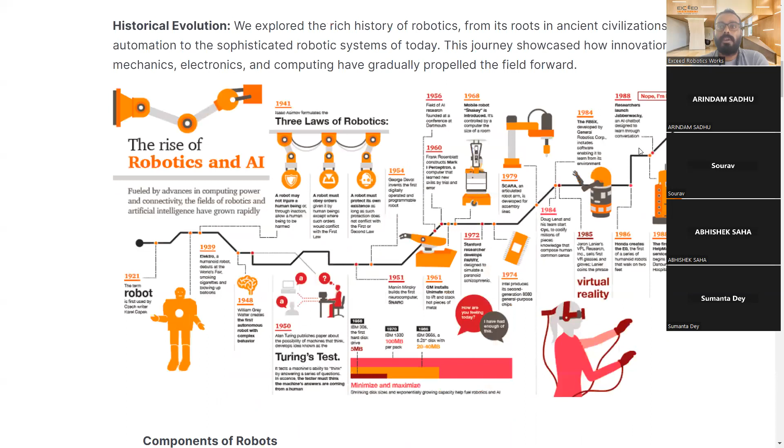If we see the historical evolution, how it came into existence and where it is currently being used, there's a funny story with the evolution of robotics, because a Czech writer, Karel Capek, introduced robotics in his play. He performed a play, and you can search through Google as well, you will find plenty of videos of that play on the internet.

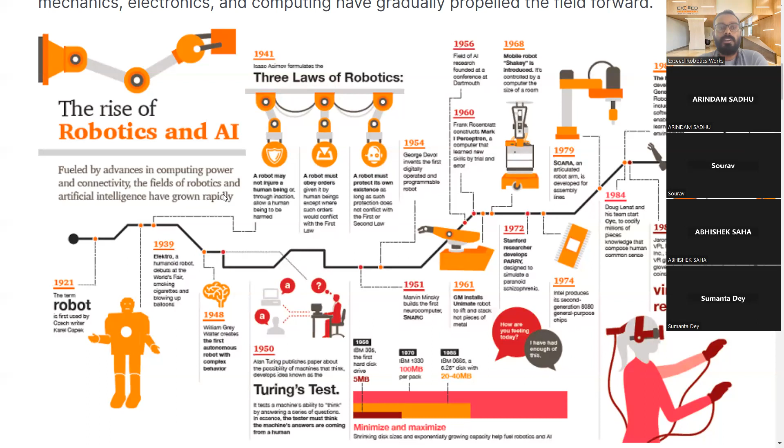He performed a play to explain to the world that we will require some devices, or in future we will have some humanoid kind of structure in place of human beings to help us carry out day-to-day tasks, or help in industry, in the automation sector, as well as everywhere around the world. It started in the year 1921.

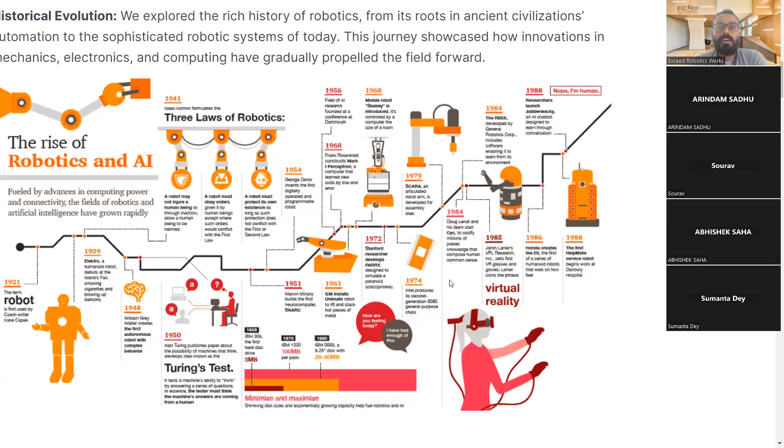Further, we have the current scenario where we are utilizing robotics in each and every sector, in assembly facilities, production facilities, as well as manufacturing sectors. So if we look closely at how a robot works, what are the different components of a robot, you can see there are plenty of things which we can correlate with our natural bodies.

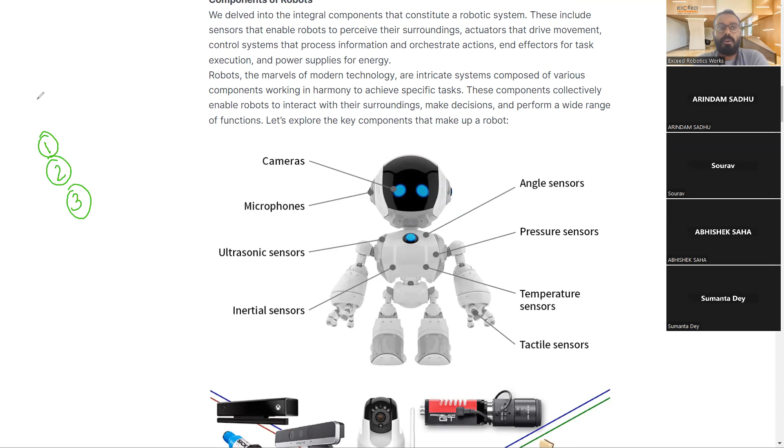According to the human body, we have three sets of things in common. In a computer also, we have these three sets of things. First is the input devices in the computer, second is the processing unit, and third is the output device.

Basically, input devices in a computer gather information from the physical environment, and the processing unit decides what to do based on the input coming from the environment, and what not to do. As human beings, we were also taught in this regard by our parents, loved ones, and many people guided us throughout the journey.

Even right now, in engineering college, teachers and faculty members were guiding you to do certain tasks in a proper way, and not to do some tasks without support from others. That is much more important.

That is what we call the programming feature in robotics. We are programmed like our parents guided us to do certain things and not to do certain things. Similarly, we feed programs to the robotic structure to perform certain tasks in the environment.

We have eyes in our body to give us visual perception, but in a robotic structure, we have cameras and various kinds of sensors to provide input to the robot's brain. The processing unit is nothing but the brain of the robotic system or any industrial automation system, through which it decides what to do and what not to do.

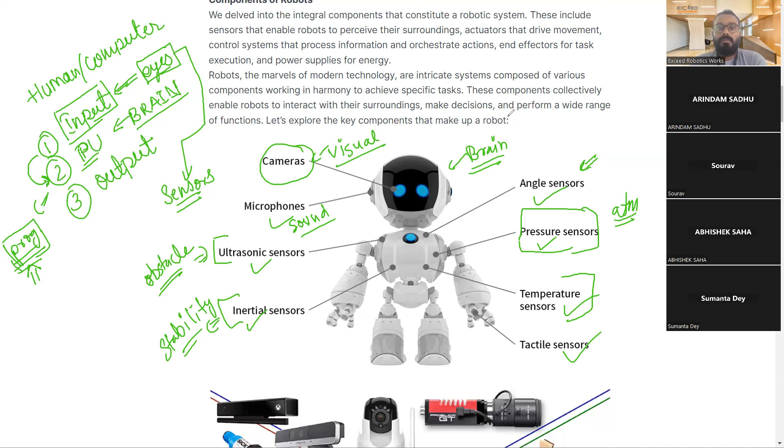So if we move further, we can see one more example to clear our doubt. We have different categories of sensors in the robotic body, whether we are building a simple robot for day-to-day tasks, or building some industrial automation - these kinds of things are required.

We have various kinds of distance sensors. The audition sensor provides audio ability, learning audio from devices. The touch sensor provides the feedback of sensation of touch, like a robot can feel something is in its hand. And vision is all about camera modules, which can identify certain things.

Have you seen any implementation of these devices in your day-to-day life? Do you have any idea how these devices are being employed around you? Anyone have an idea where you've seen these sensors used to help carry out certain tasks or regular activities?

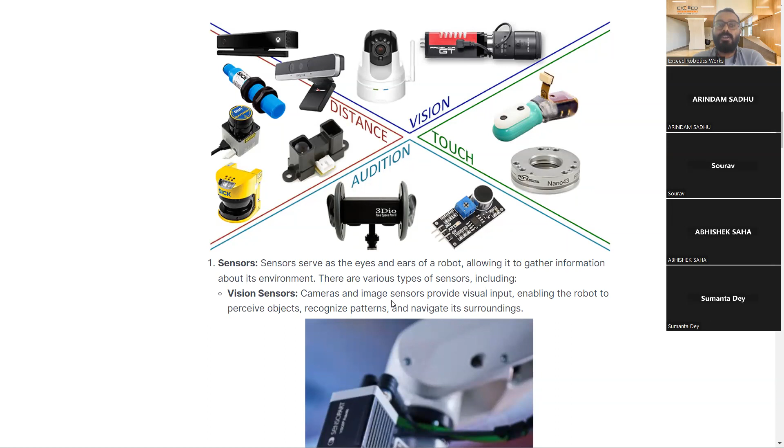No? For vision, just like CCTV camera is used. Yeah, that's great. So apart from the CCTV camera, we can see one implementation of camera technology in traffic light signals, right?

The camera can detect and take video from the environment, and further programming can detect the presence of a person wearing a seat belt or not, or a person wearing a helmet while riding a bike or not. These systems are already implemented, and that particular system is known as ITMS.

We are talking about the ITMS project - Intelligent Traffic Management System. This kind of system is also part of automation, utilizing several programs and combinations of these things to help carry out the task, so authorities can detect whether violators are there or not.

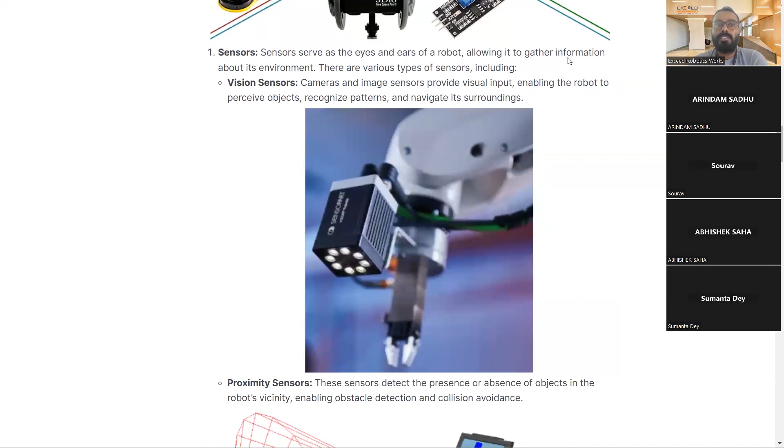So you can see plenty of vision sensors being employed in different robotics. If you go through Google search, you'll find plenty of cameras and image sensor modules provided, and in a later slide we will discuss their implementation.

From the robotics point of view, many boxes have color codes in them. In separation industries where the process requires identifying each object, and we have to separate those objects accordingly into racks or other places, we can utilize the image sensor to understand what is in front of the robotic structure.

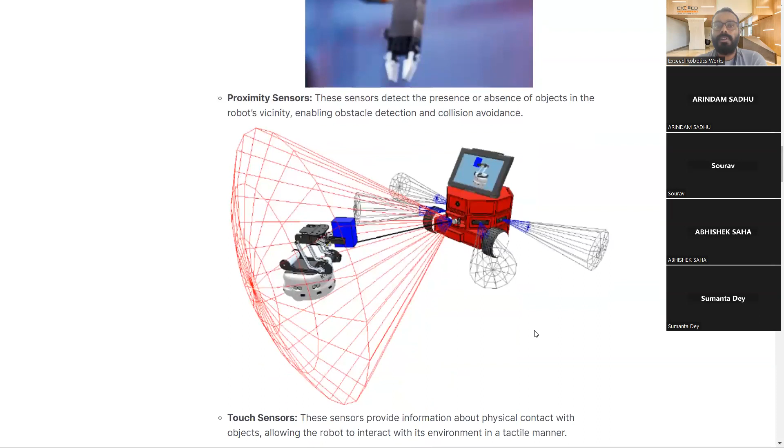So proximity gives the alert system, providing the alert feature to the robotic structure. It helps the robotic structure identify the robotics environment. Proximity sensor can detect obstacles in front of the robotic system, and we utilize the proximity sensor to build a 3D map around the robot.

We build a 3D map around the robot so it can understand what is on the right hand side, what is on the left hand side, in front as well as in back. Whenever an obstacle comes in front of the device, the sensor will inform the brain to stop producing motion in that direction, so the robotic structure will stop its command and follow another direction from the brain command.

So we are utilizing these kinds of sensors in our robotics structure to help robots understand more about their environment, as well as perform their work without any further problem. One more example is the touch sensor, and you all know the importance of touch sensor in our life, right? Do you know where touch sensors are currently being used?

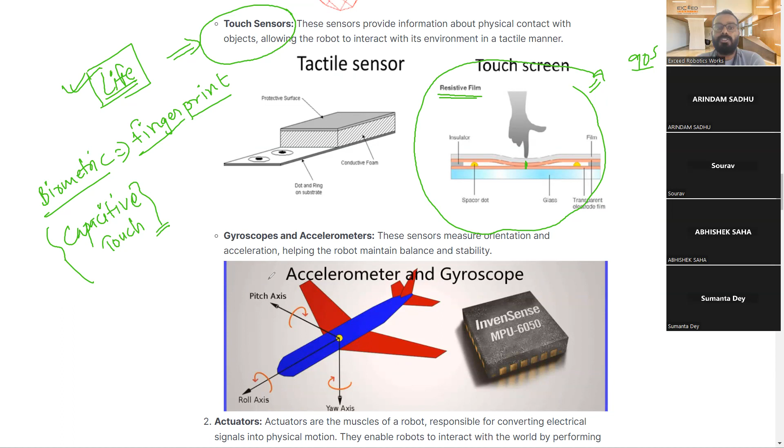Right now we have another technology in our hand, what we call capacitive touch. Capacitive touch takes the capacitance from your body and informs the mobile to do certain tasks. It won't work if you use plastic or any other material compared to the normal skin of our body. This is how the capacitive touch screen works in our mobile phone.

Further, we have gyroscope and accelerometer. You will know where gyroscope and accelerometer are used nowadays. One major example is in planes and different rocketry systems. Have you ever heard about SpaceX or Tesla, and the founder of both, Elon Musk?

Have you ever heard this name? Correct. And why is SpaceX so popular? Do you have any idea? Anyone have any idea why SpaceX is popular in the rocketry business? Anything that's in your mind, just speak it out. I'd like to see your knowledge base so I can deliver the content accordingly, that's very important for me to estimate everything.

They make reusable rockets, that's a great answer. Reusable rocketry system means once you launch your rocket from the ground to outer space, it will come back to the ground and land itself. There's no involvement of human interaction in this process, because it utilizes these particular sensors to identify the location of the rocketry system, so it can sense which direction and what orientation the incoming rocket has, and then it shoots out the propellers.

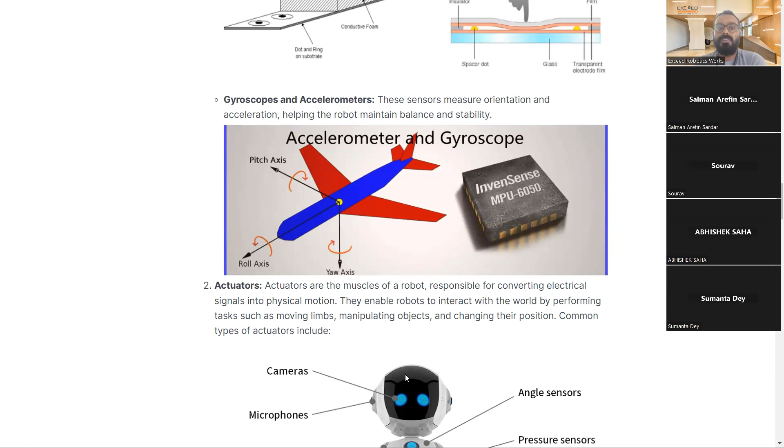So after that, what we do have is the actuation system. Remember, I mentioned one of the important terms, like why the robotics structure does have actuators, right? And what actually is the actuator in a robotic system? Actuator is nothing but relates to the three basic components to build any robotic system.

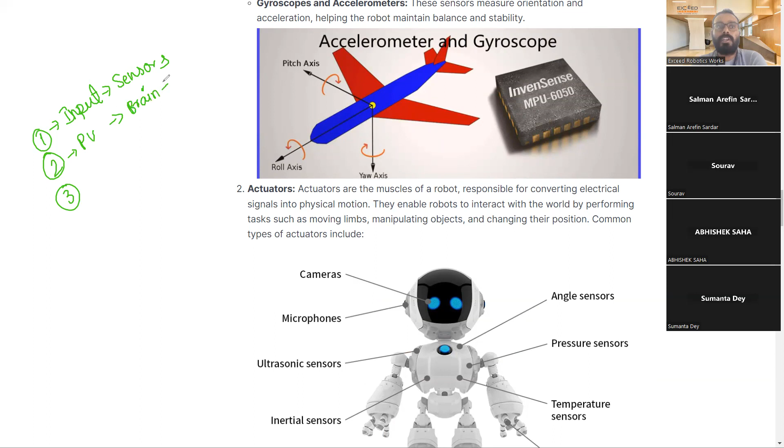First one is the input device, and in robotics we call it the sensors. Second one is the processing unit, which we call the brain of the robotic system, or the technical term for this particular brain is microcontroller. We are going to utilize some microcontrollers for this application. And further, what we do have is the output device, which is responsible to provide the actuation and locomotion.

Actuation and locomotion. And why I mentioned actuation and locomotion, because it is all about producing some kind of motion in the body itself. So actuation and locomotion system is responsible to produce motion in the body. The word actuator came from the word actuation. Actuators are able to provide the functionality of motion in the robotic body.

So actuators are the muscles of a robot, responsible for converting electric signal into physical motion. They enable robots to interact with the world by performing tasks such as moving limbs, manipulating objects, and changing their position. And the common type of actuators are... I guess one mistake happened there.

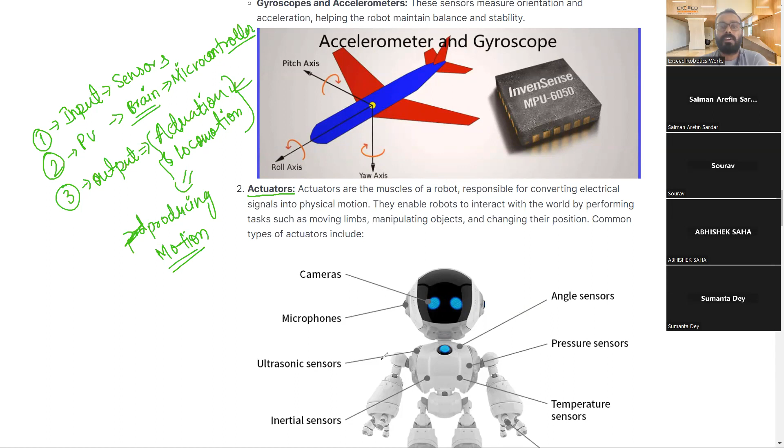This image is mentioned here, but this one is not the right image. I will share you different images of these actuators in the group.

So after the actuator, what we do have is different kinds of motors. Actuators are something different compared to motors, right? You already learned the concept of motors in your earlier classroom program in class 10, 11, 12.

And further in engineering, you heard this particular term like actuation. So a motor is a device which can provide actuation in a robotic body, but is not actually the actuator, because it always produces motion in a circular direction, whether it is clockwise direction or anti-clockwise direction. So, clockwise direction and CCW.

Remember, during the workshop I explained, if by any chance you attended the last workshop in GKCM, you have understood the concept of servo and why we are utilizing servos in place of motors in our robotic system. Do you have any idea what servos are and why we are going to use servos in our robotics applications?

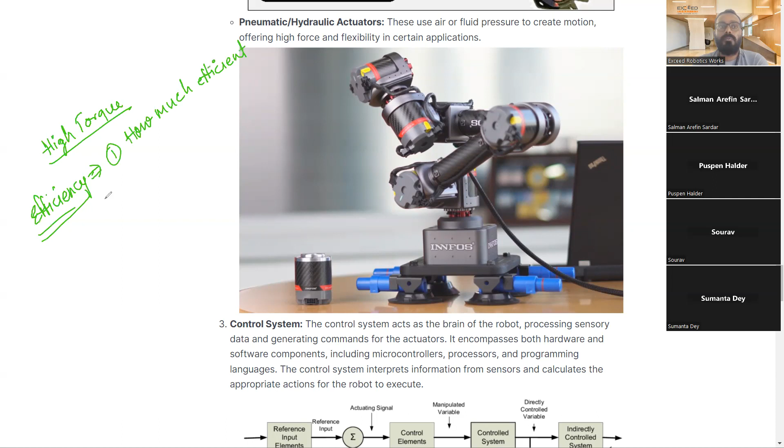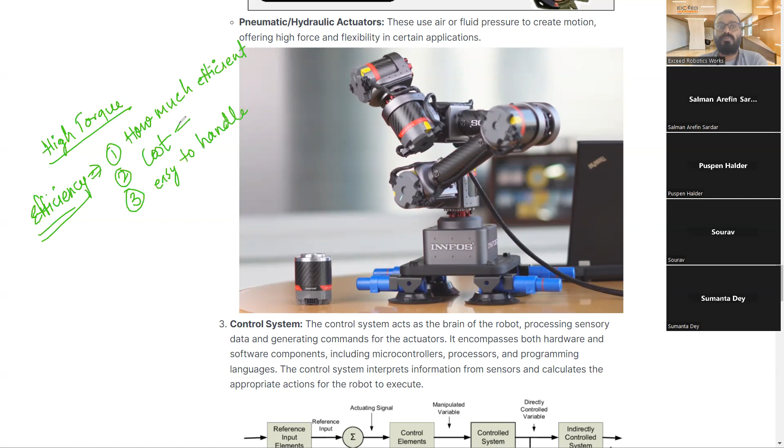And whenever we talk about the usability of high torque in industrial automation, it means we sometimes think about the term of efficiency. And whenever we design something, even if you're going to build some project, we think of a few considerations. First one is how efficient the system is, and the cost involved in building that particular project. The third one will be how easy it is to handle. So whenever cost comes into play, and we talk about the electrical energy to drive the engines or drive things like the robotics system itself, it requires more electric power compared to conventional things.

So using these fluids, meaning air and liquid...

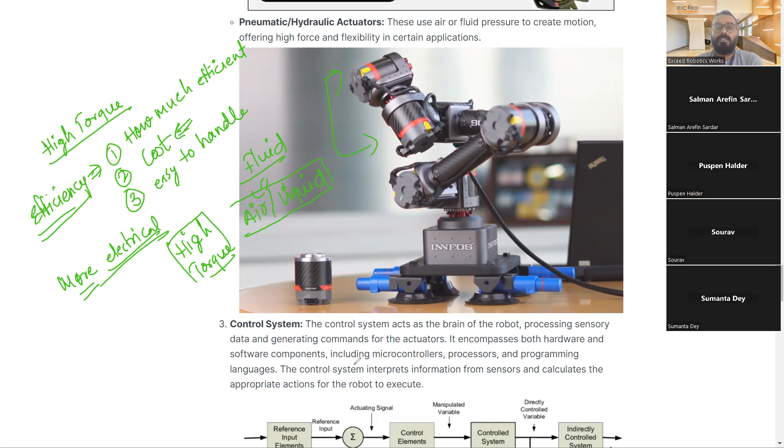So we can generate high torque with ease, and that is what we require in industrial automation, where the robotic structure has to lift heavier objects or place heavier objects from one place to another. Even exploration of space and diving into the deep sea requires high pressure applications, so that's where we can utilize pneumatic and hydraulic structures. This is why these are important in robotic systems.

So let's talk about the control system of our robotics. As I mentioned earlier, the control system is the brain of robotics. The brain of robotics has the capability to decide what to do and what not to do. The control system acts as the brain of the robot, processing sensory data and generating commands for the actuator.

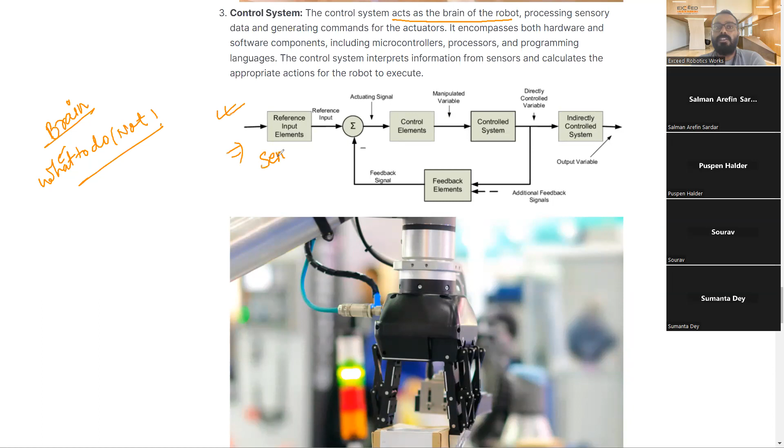It encompasses both hardware and software components, including microcontrollers, processors, and programming languages. You can see a reference diagram here, where the sensor provides inputs to the system, that is the reference input. We also have actuating signals, indicating whether the device is in the zero state or at some point in time. For example, with a 3D printer, whether the printer head is in the home position or mid position, it identifies this through actuating signals.

The control element helps the system decide what to do and what not to do. These feedback signals and their composition make up the brain of the robotic system, how it's designed based on inputs and control elements. After processing the data, it helps the output device understand the situation and act accordingly. Acting on a system is about actuation and locomotion, which we already learned before this control systems topic. Acting is something that produces motion or feedback.

Even if we are glowing an LED at one point in time, we are producing some kind of output. Glowing an LED is also a way to understand the output of a robotic system.

You've already seen in various places like YouTube and industry, maybe you've visited some industries to see this particular thing in the production facility, like the end effector. This is the system through which a robotic structure can handle different objects. The end effector is very much important for the robotics structure.

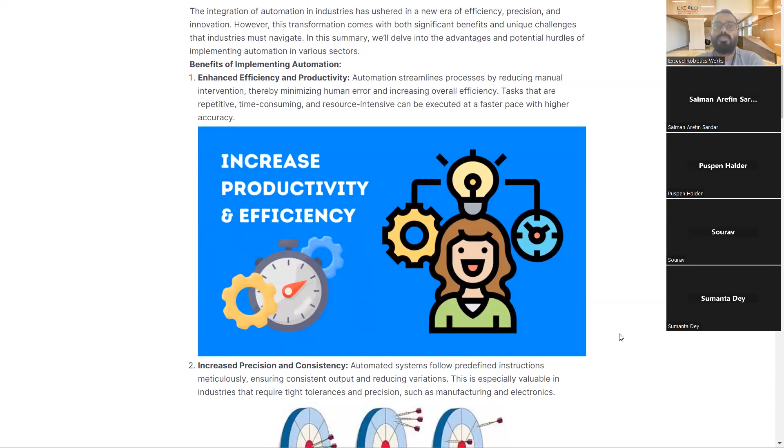So we are going to utilize those things, and it will help humans increase our efficiency in each and every place, as well as make our life easier to carry out those tasks. So yes, it increases productivity, efficiency, and also increases precision and consistency.

When we talk about the healthcare world where robotics is being used, you can see many examples where precision surgery is being carried out by the use of robotic systems like the end effector and the combination of things, right?

So in the medical sector, precision as well as in the manufacturing sector, precision is very much important for all of us. Even if you make some product more than 1 millimeter off, like if the dimension is 50 mm or 50 centimeter, and you make it 50.1 centimeter, then it won't work in a rocketry system or in a production facility, because it will cause failure to the system itself.

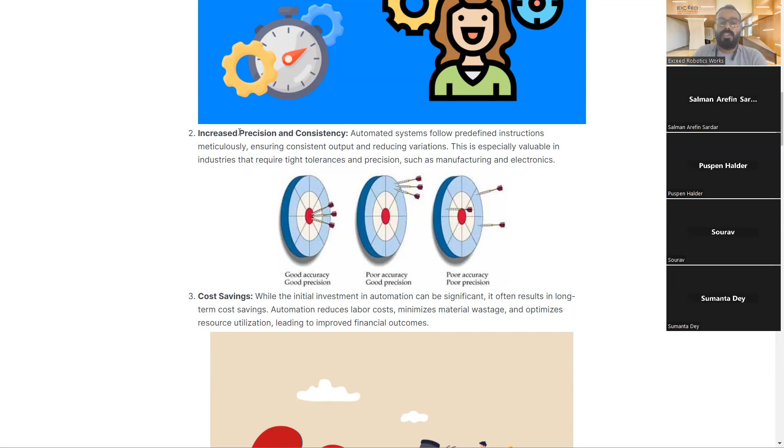So implementing robotics in our day-to-day life can increase the precision as well as the consistency. Each and every mobile phone, I'm just giving you a simple example to understand. If you take the example of a mobile phone, it is identical to the same model another person is using, right? So consistency comes from automation only, because in automation, what we have is the feedback loop.

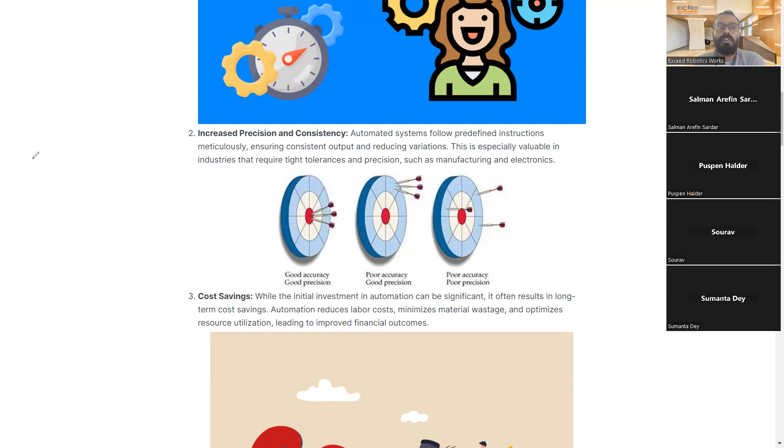It is not only dependent on what the robot is manufacturing, but after the manufacturing process, it is taking feedback from the system, like exactly this much amount of dimension being covered or not. It takes care of each and every data, like the length, width, in terms of the mobile phone case or anything. So precision and consistency is important in this segment.

Because we cannot deal with the inconsistent part, and it will also eventually cost us more to rebuild those stuff and go through the same. So cost saving, yes. Involvement of human beings in the production facility may cost more than required, because we have to go for proper maintenance in the period of time, right?

We cannot perform the task for a long run. We can only do the shift-wise work. A normal human being can work for almost 6 to 8 hours a day, but a robotic structure won't say that to you. A robotic structure will complete the task even though we are running the system continuously for a year or more. It won't come and say that it has a problem, that it's getting tired.

It won't give you the excuse. So removing the excuse factor, yes, we can reduce the labor cost, minimize the material wastage, optimize the resource utilization, and all these scenarios can lead to improved financial outcomes.

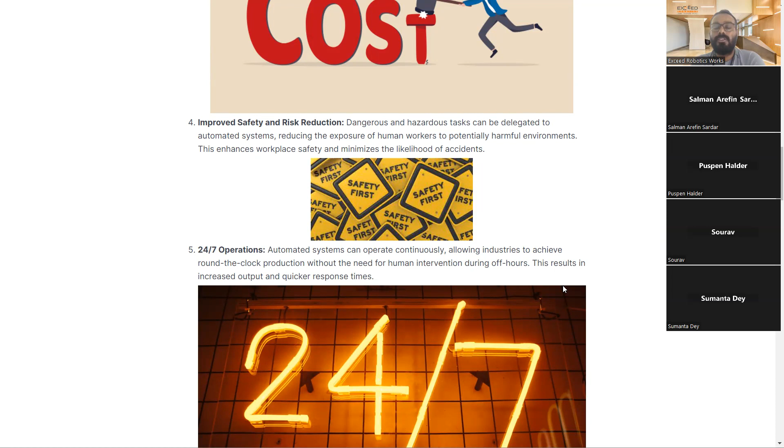So reducing the exposure of human workers to potentially harmful environments enhances workplace safety and minimizes the likelihood of accidents. And also, as I mentioned earlier, 24/7 operations can be carried out using robotic structures.

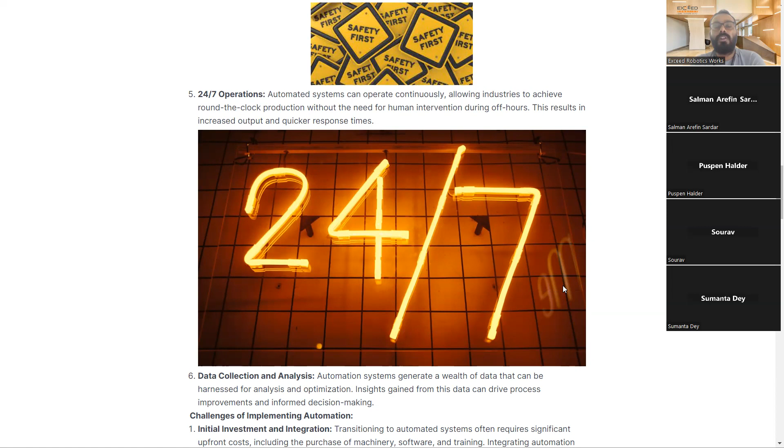An automated system can operate continuously, allowing industry to achieve round-the-clock production without the need for human intervention during off hours. Suppose we have to go for production of something, then we can rely on our robotics product to build those things for us, as well as use data collection and analysis.

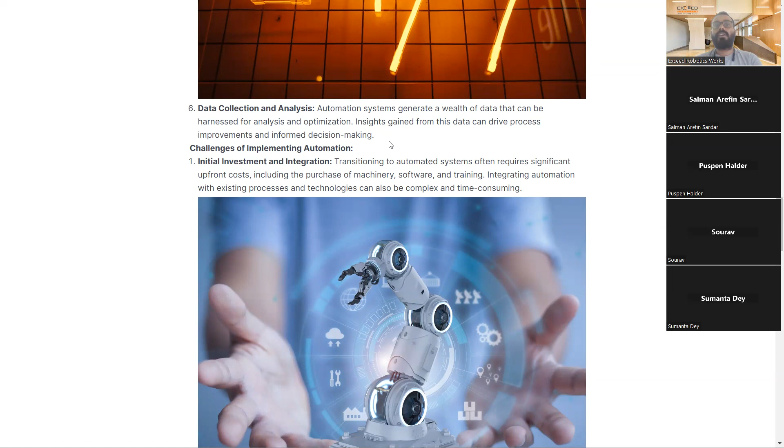Automation systems generate a wealth of data that can be harnessed for analysis and optimization. We can also learn from this system how they are performing certain things, and we can come up with ideas on how to improve that particular thing in our production facility. So insight gained from the data can drive process improvements and inform decision making.

So the challenges. Right now we understood the major concept of robotics and automation in industry. So what are the challenges we are going to face, during the time of implementation of automation and robotics in our workplace?

Initial investment and integration, yes, initial investment is a major point to consider because you have to pay for the machinery, software, and training materials. Like you are going through one of the training sessions here, then only you will come to know how this thing works. In industry also, many people have to go through the same training procedure and must know how to use the software, and also the major cost involves the machinery itself, because those machines come at a very high precise value. So the more precision we speak of, the more cost we have to pay, right?

Also in normal software you can see these examples. The more advanced version of mobile phone you purchase from the market, the more you have to pay compared to the normal version of mobile phones. So yes, the skilled workforce and training is absolutely required for the same. Automation necessity requires a skilled workforce capable of designing, operating, and maintaining automated systems. Training employees to work with advanced technology is essential, but can pose challenges. So this is a major thing to consider.

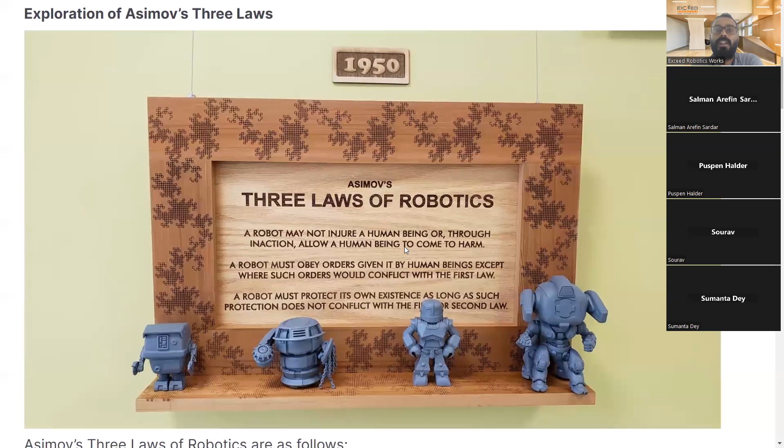The three laws of robotics: the first law is that a robot may not harm or injure a human being, or through inaction allow a human being to come to harm. So we will not design a robot that will harm a human being, unless the human being comes in contact with the ongoing process and harms themselves.

The second law states that a robot must obey orders given by human beings, except where such orders would conflict with the first law. So I'm not going to tell my robot to go and harm someone - that would contradict the first law. At no point of time will we guide our robot to harm other human beings. The second law would not override the first law; it should follow the first law and not produce conflict with it. So a robot must obey orders given by its human, unless we say to harm some person and do an unrequired task - it won't do that for us.

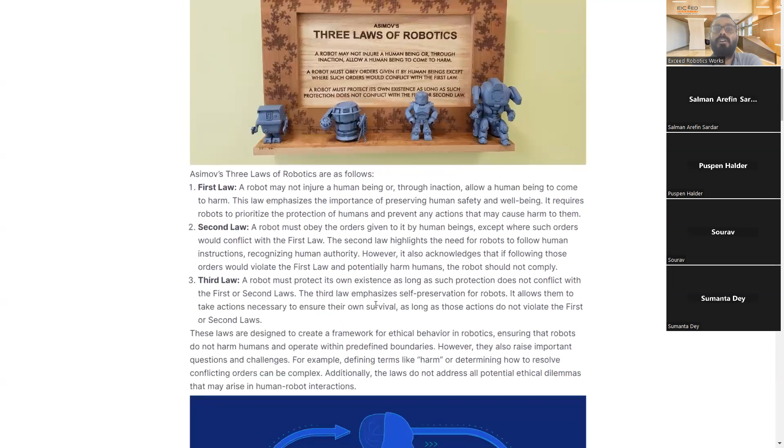The third law of robotics is that a robot must protect its own existence, as long as that protection does not conflict with the first and second laws. So a robot can protect its existence, but it should not conflict with the first and second laws. The third law emphasizes self-preservation of the robot, meaning the robot can preserve itself and take necessary action to ensure its own survival. Because in future we might open a production facility where something is being produced, and give a command to the robotic system to proceed with production and complete it.

I'm not going to look into it. You have to take care of each and everything. So the robotics structure should know how to repair themselves.

Then only the production thing will go smoothly throughout the time, right? So these laws are designed to create a framework for ethical behavior in robotics. Like we do have ethical consideration in our life, right? So whatever we do in our life must be ethically correct, ensuring that robots do not harm humans and operate within predefined boundaries.

However, they also raise important questions and challenges. For example, defining a term like harm. What does it mean? Because robots don't know anything about harm, right? They don't know what is being harmed or how it can correlate with the same incident.

Suppose if our parents try to beat us, that is the complete story, that is not harming us in all the senses. But if we have some fight with other people around, and they intentionally try to make us uncomfortable, then it is called harm.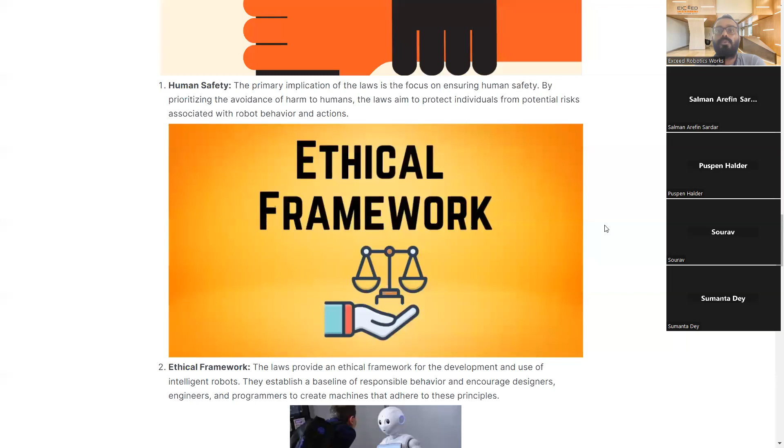So the implication and limitation of the law is all about human safety. We should consider the ethical framework, which I already mentioned. So the law should focus on ensuring human safety by all means, right? By prioritizing the avoidance of harm to humans, the law aims to protect individuals from potential risks associated with robot behavior and action. So ethical frameworks are also very much important.

And human-robot interaction, how a robot will deal when a human comes in front of the device. So they emphasize the importance of robots following human commands, respecting human authority, and prioritizing human well-being. So trust and acceptance, yes, trust is a much more important aspect in our life as well, apart from robotics.

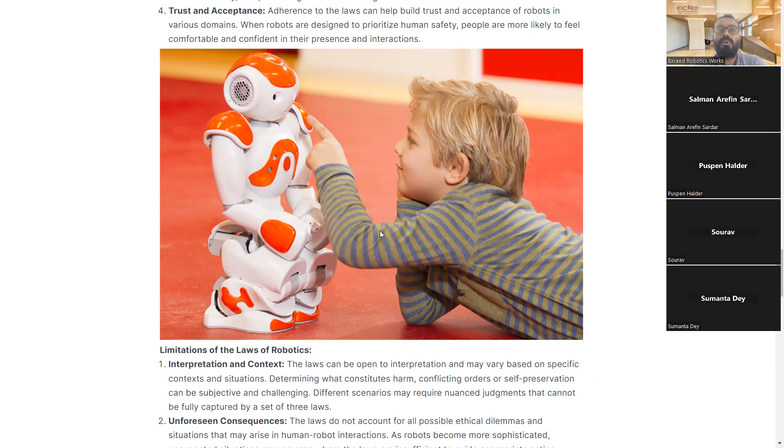So whenever you try to build some trust, try to keep it as it is, right, in your day-to-day life. So trust and acceptance is also a major key point to consider in robotics implementation. And some of the limitations are there in the laws of robotics.

First one is the interpretation and context, unforeseen consequences, conflicting priorities, lack of universal adoption, and ethical gray areas.

Suppose you have something like unforeseen consequences. The law does not account for all possible ethical dilemmas. Situations may arise in human-robot interaction as robots become more sophisticated, and unexpected situations may emerge where the law is insufficient to guide appropriate action. Suppose you come in contact with a robotic structure while it is producing some motion, and you harm yourself in between, and after that you blame the robotic body, saying it did that to me. We should not do those things, and we should take care of these limitations in robotics while building any systems from scratch.

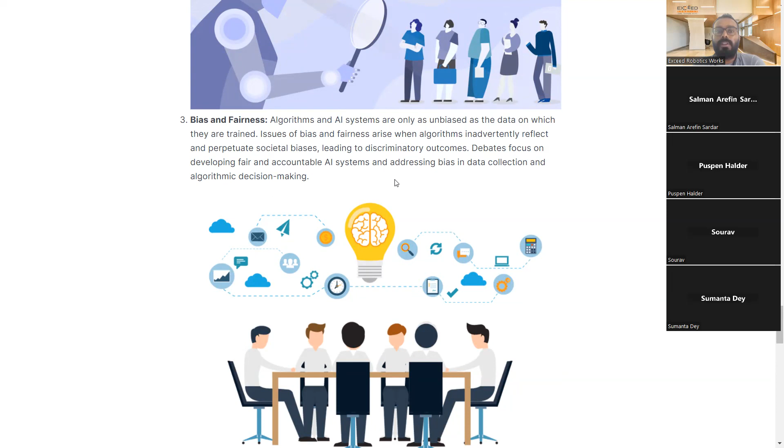We already discussed ethical considerations and debates like privacy and data security, job displacement and economic impact, bias and fairness. AI systems and algorithms are only as unbiased as the data on which they are trained. Suppose I provide data like Sourav is a good boy, Salman is a bad boy, or Salman is a good boy, Sourav is a bad boy - then my AI system will learn that some person is good and some person is bad. So the AI system takes decisions based on the training modules we provide. It's all about the training modules we present to the robotic system. We have to debate this, focusing on developing fair and accountable AI systems and addressing bias in data collection and algorithmic decision making. Only then can we conclude how to utilize this system.

Accountability and transparency is one more major thing to consider. As AI systems become more autonomous, questions of accountability and transparency emerge, because it becomes crucial to understand how decisions are made and how to hold responsible parties accountable for the actions of AI systems. Suppose Sourav is developing a robotic or AI system - he should be accountable for what the AI developed by him does to other people around. Those are the frameworks we should consider, like human-machine interaction and autonomy, ethical decision making by machines, and long-term impact and existential risk.

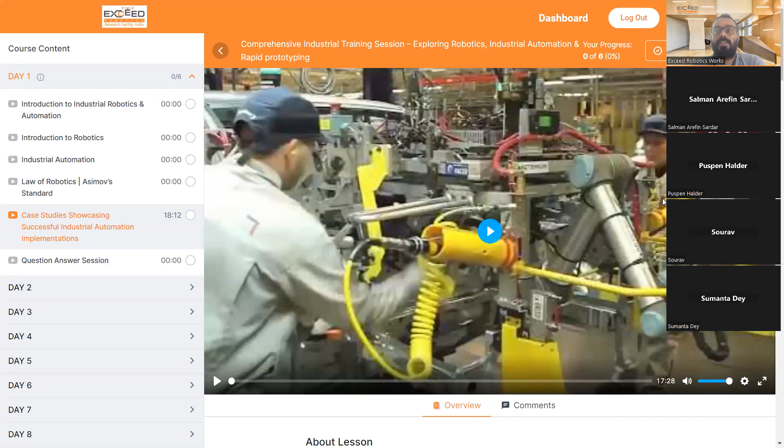Let's move on to another segment of this journey. Let's see some case studies where we are still utilizing robotic structures in our day-to-day life. I'm going to play this short video for you to understand the implementation of robotics in industry.

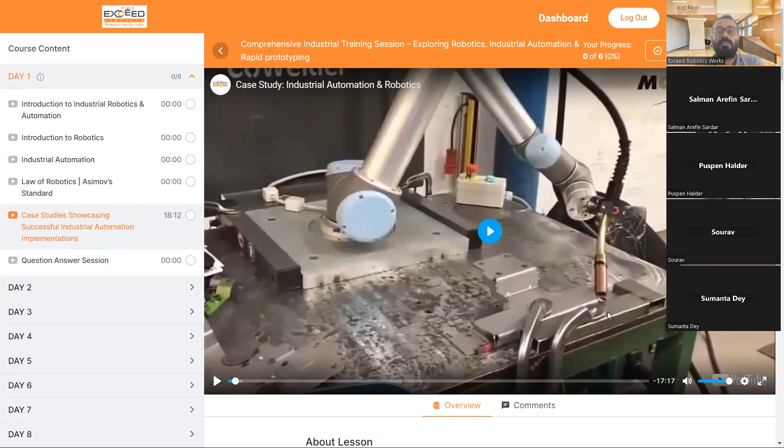So you can see many industries do require welding processes and so on. These are the basic concepts of how to utilize servo motors and stepper motors.

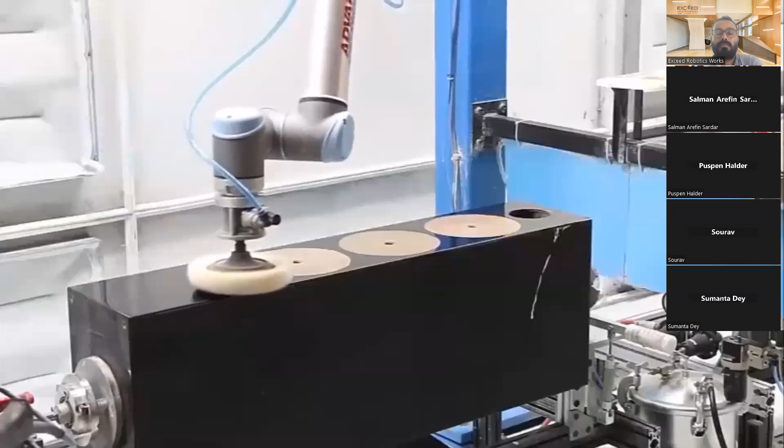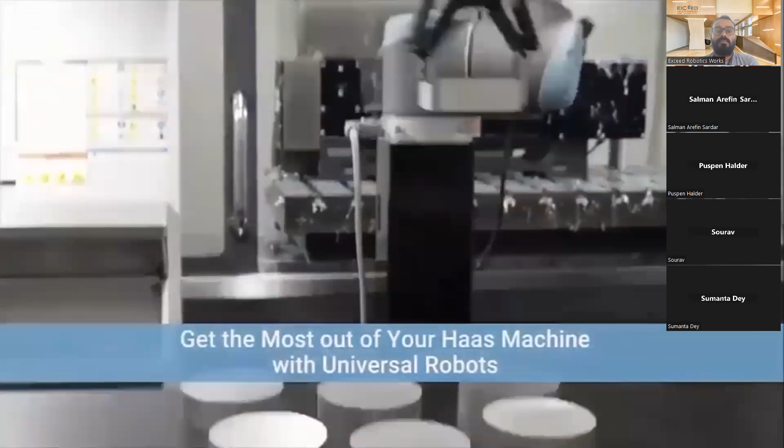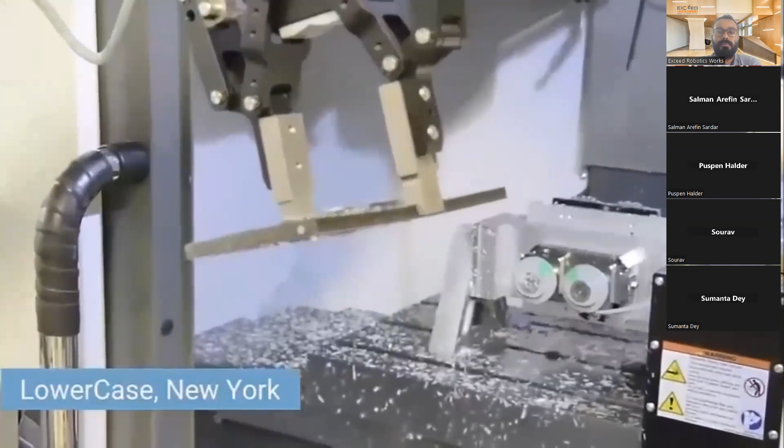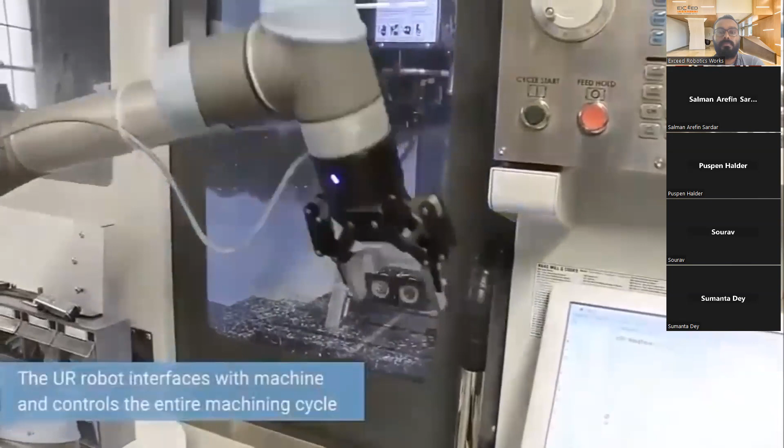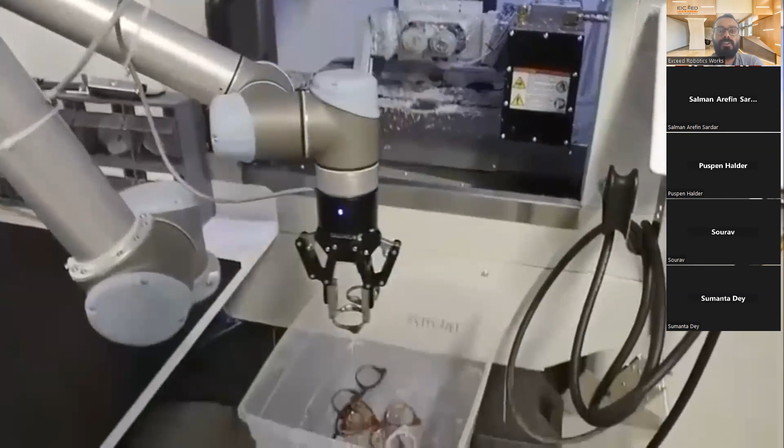The Haas machine is popularly known in the robotics segment because it can use end effectors to pick and place components in the facility itself. You can see plenty of examples on YouTube and other places, and find many research papers related to using end effectors and so many things. Here also we have the CNC machine in which the end effector is effectively placing glasses in the production facility, to pick and drop objects like finished products.

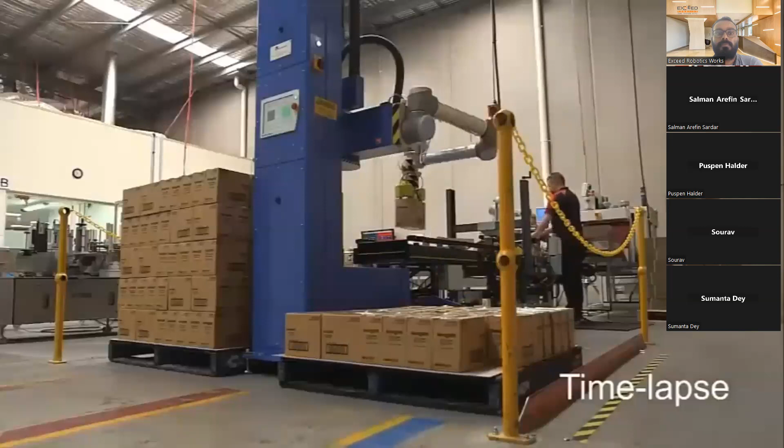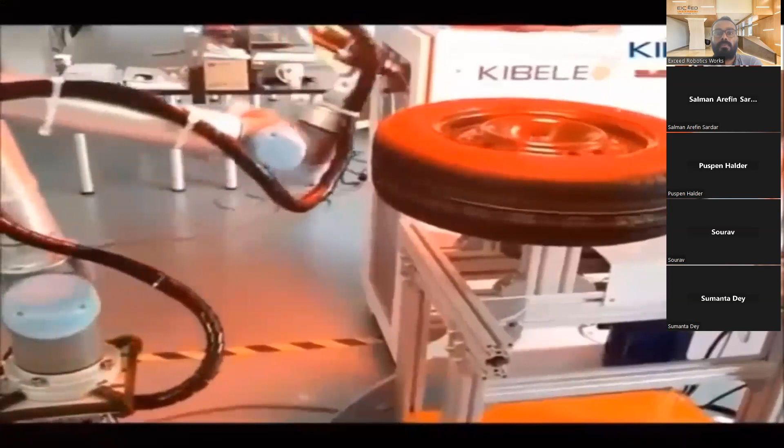In a vehicle assembly facility also, we can see the implementation of robotic structures. In many more conventional outlets, you can see the alignment center - this particular robot is aligning the wheel properly on the rim side. You can also design such a system for yourself by having a conceptual understanding of these things.

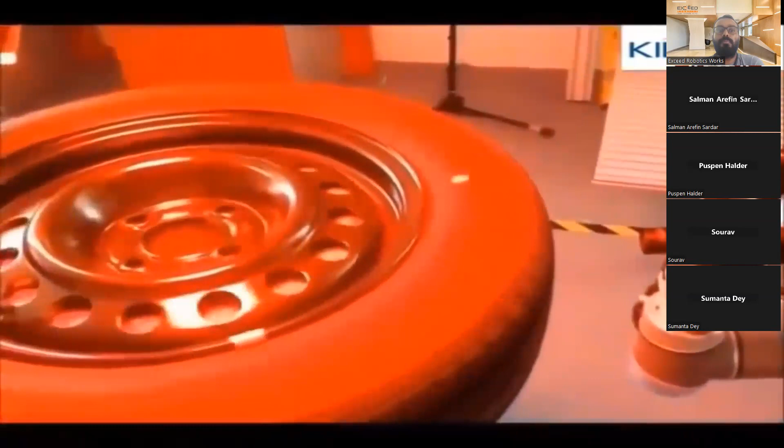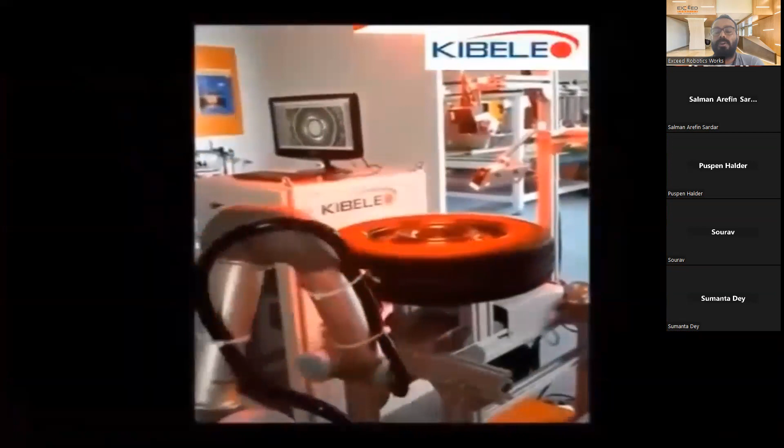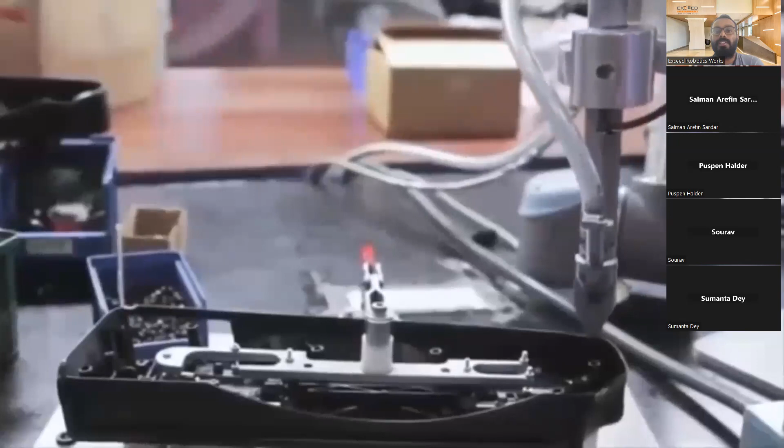The robotics segment is important for all of us because we will have a proper discussion, not only in terms of building hardware devices - computer science students may ask, sir, why are we doing this? We are not into production or something. Let me clear that up: it involves programming, and through programming you can learn different things. We are utilizing Python scripts for AI development, and that's the major reason you should join this type of program for your future perspective.

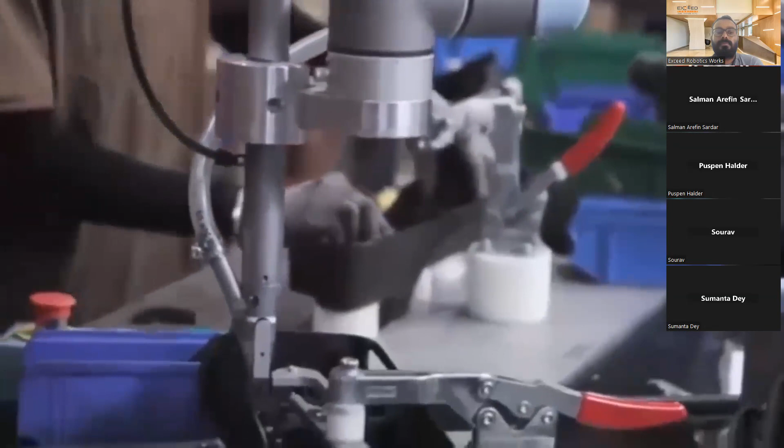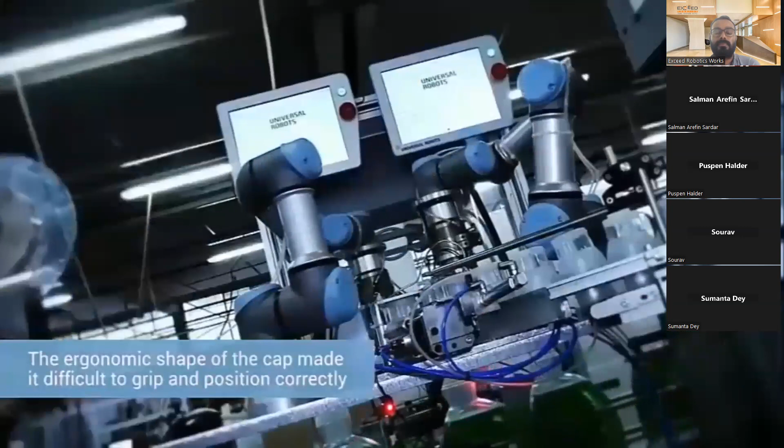More consumer-focused products for mass-market machinery, producing smaller batches with the same features as before, but with higher quality. We were drawn to an arm rather than a traditional 3-axis pick-and-place system.

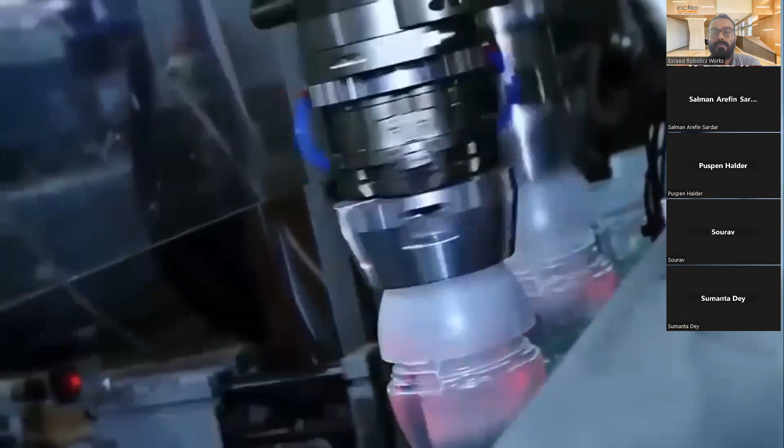This challenge was met by Universal Robots thanks to its torque and positioning control, which is already integrated into the Universal Robots software.

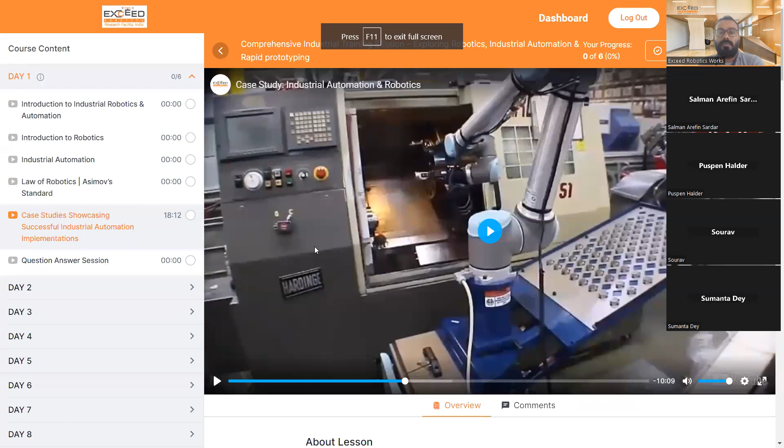So these are the case studies that you can also have access to after this meeting, because I'm going to share the login ID and password for this portal, and you will have proper understanding of this theoretical portion. So the reason why I mentioned these things in the first class is because it is important for you to understand the core concept, how we are utilizing robotics and automation in different environments, as well as in industry.

As you already heard about the Industry 4.0 program from the government itself, it requires knowledge of these kinds of domains: the Internet of Things, cyber physical systems, additive manufacturing, automation and industrial robots, simulation and modeling, blockchain, augmented reality, big data analytics, cloud computing, as well as artificial intelligence.

Let's see some case studies today, and after the case study, this session will continue. So the case study is all about some of the major factories we have in our world, like Tesla's Gigafactory. Tesla's Gigafactory is a prime example of automation's transformative impact.

The factory employs thousands of robots for tasks such as welding, painting, and assembly. This automation has enabled Tesla to achieve higher production volumes and maintain consistent quality across its electric vehicles.

That is why, whenever we buy something from the market, from a specific brand, the reason we go for a specific brand is because of their quality of service, right? After-sales service and the quality of materials they are utilizing in their production facility.

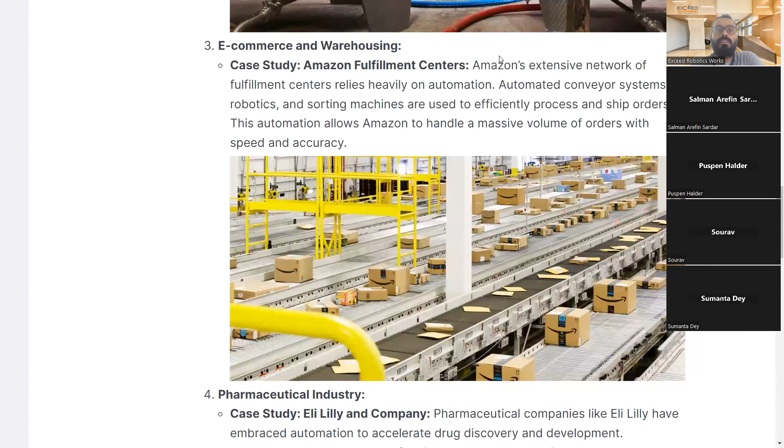Automated conveyor systems, which you can see in this picture here, and sorting machines are used to efficiently process and ship orders throughout the world. This automation allows Amazon to handle a massive volume of orders with speed and accuracy.

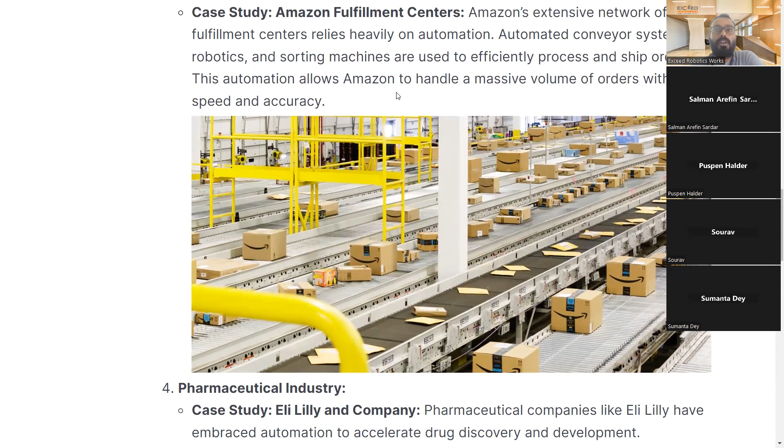In the pharmaceutical industry, you can take the example of Eli Lilly and Company. This company has embraced automation to accelerate drug discovery and development. Automated systems are used for high throughput screening, compound synthesis, and quality control testing. Automation has expedited the research process, leading to faster drug development.

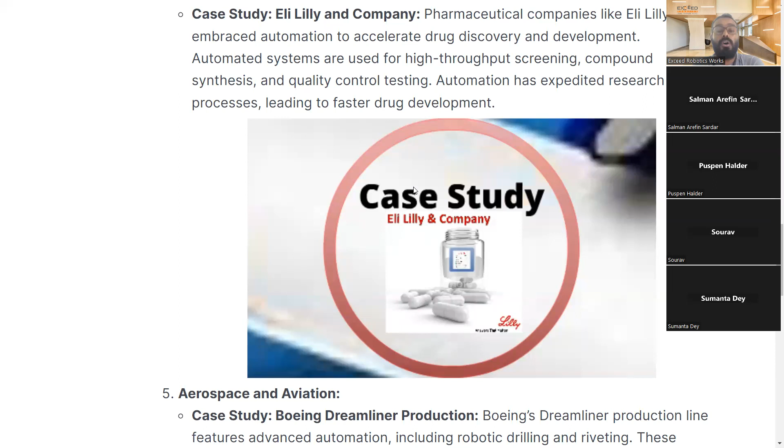And through development, meaning in the development of medicinal things, in India also we utilized the same during the COVID period for the development of vaccines, right? We utilized several automation technologies to automate those processes, and we came to the conclusion that we helped the world.

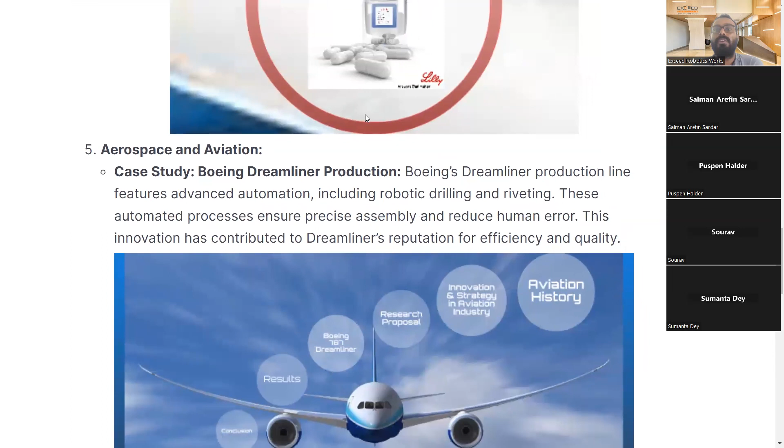We helped each and every person in the world. We tried our best to help each and every person, but not all the people in the world. Some countries received the vaccines from our side.

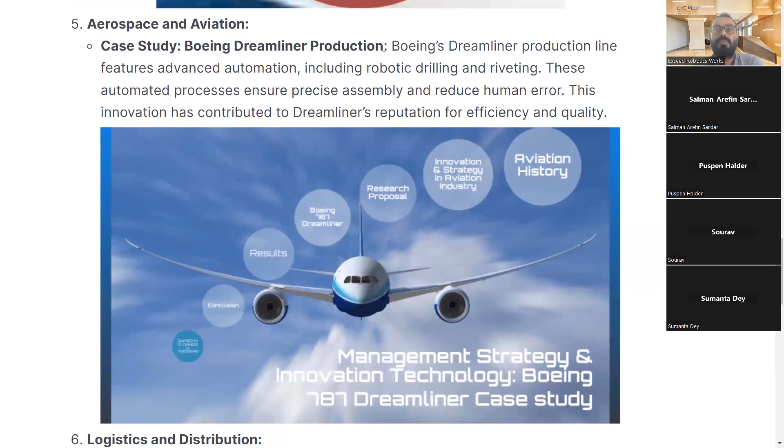The Boeing Dreamliner in the aviation industry is the perfect example of a high-end automated production facility, because the production line features advanced automation, including robotic drilling and riveting. This automated process ensures precise assembly and reduces human error.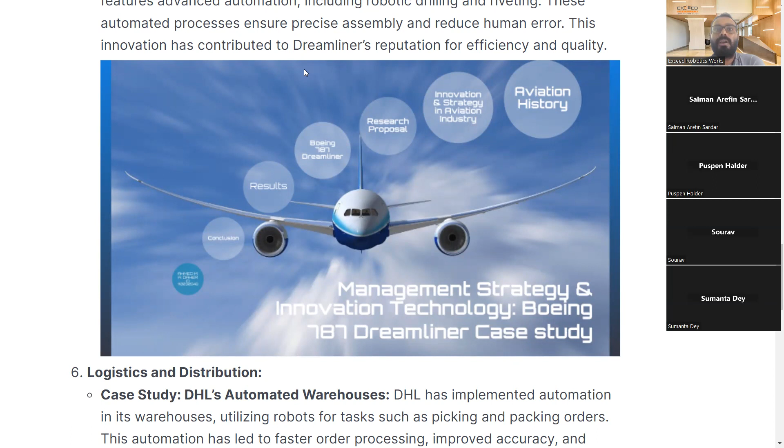This innovation has contributed to the Dreamliner's reputation for efficiency and quality. We've all heard about the Boeing facility, right?

In logistics and distribution, we have a great example: DHL's automated warehouse. DHL has implemented automation in its warehouses, utilizing robots for tasks such as picking and packing orders.

This automation has led to faster order processing, improved accuracy, and optimized space utilization.

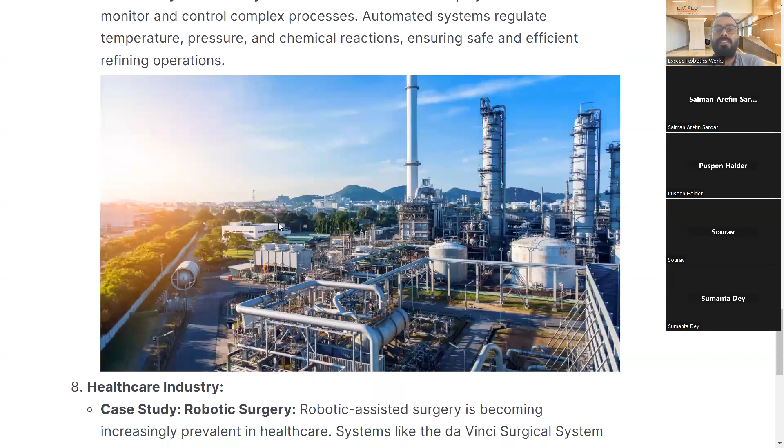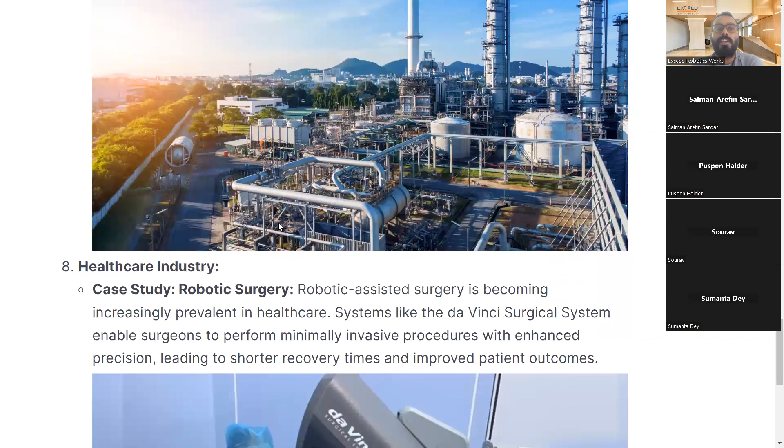In the energy sector, we can see examples like oil refinery automation. You've already seen this image on the internet, right? Each and every person has seen this image before. The oil refinery utilizes automated systems to regulate temperature, pressure, and chemical reactions. Programming is involved in getting data from sensors and responding to particular environmental points, ensuring safe and efficient refining operations. It also creates a safer workplace for us, because without this safety, we cannot perform our duty with full concentration. If you know you're going to get hurt in this process, you won't take the process.

In the healthcare sector, as I already explained, in robotic surgery nowadays we are utilizing robotic structures to perform precision surgery. Robotic-assisted surgery is becoming increasingly prevalent in healthcare. Systems like the Da Vinci surgical system enable surgeons to perform minimally invasive procedures with enhanced precision, leading to shorter recovery time and improved patient outcomes.

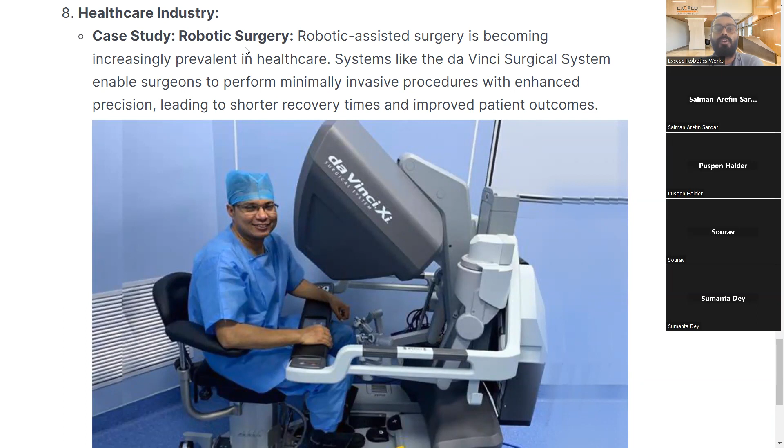You should go over to YouTube and watch how the system works. It will be fun to watch, and it will be more informative for your studies, because we are the engineers, and we are responsible to develop different technologies in the world. So if we focus correctly on our topics, what we have in our syllabus, in our day-to-day life, and also focus on different new upcoming technologies, then we can build our scientific platform.

We can build ourselves as scientists in the near future. Those scientists were also, at some point, engineers themselves. They tried different combinations, went through the theoretical portion, went through the research portion, and then finally came to the conclusion with the product itself.

So from automotive manufacturing to healthcare, automation has proven its ability to increase efficiency, enhance quality, and reshape industry. These success stories serve as inspiration for further exploration and innovation in the realm of automation.